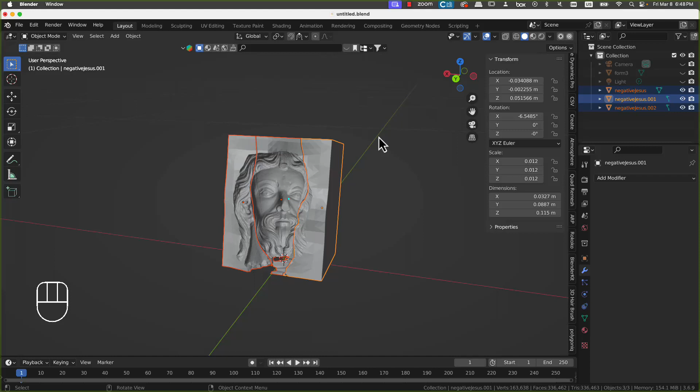Hi, I want to do a quick tour of some things for the midterm regarding 3D printing, specifically on using less material.

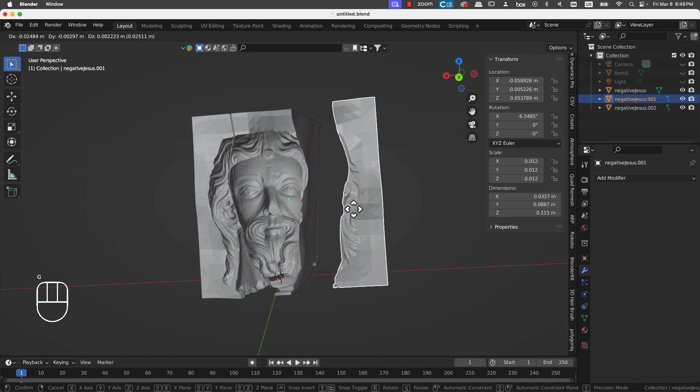Okay, so I have here the negative Jesus model that you've probably seen before, even as a ring with its parts. I'm going to work on one part, which we'll call part A.

I could do the cut now, but I'll do that later because what I want to go through is how to use less material. So I'll do File, Export.

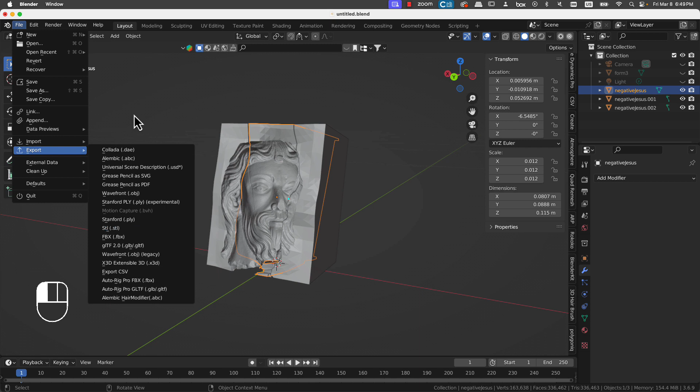Sorry, first I'll make sure that the size is correct. Each one of these squares is 1 meter, which is a bit more than 3 feet.

So that's quite big. If you want to check that the size is correct, you can append a file on the base folder called printing volumes. Click on append, choose the printing volumes.blend file, click on object, then click on form 3, and that will show you the printing volume size of the form 3 printer.

Naturally, you don't want the print to be larger than that, and we want some control on the size. So this size is sort of okay.

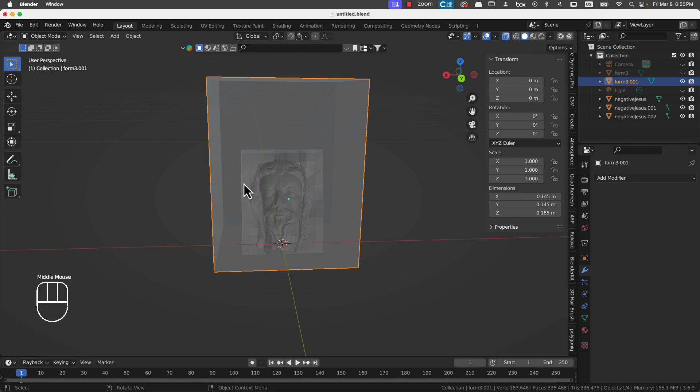If you need something more specific, I'll delete this volume now. Turn off the X-ray. Blender does have a measurement system you can use here.

You can also turn on this magnet here and click on face nearest, and that way I can move these measurements and measure things with a lot of precision.

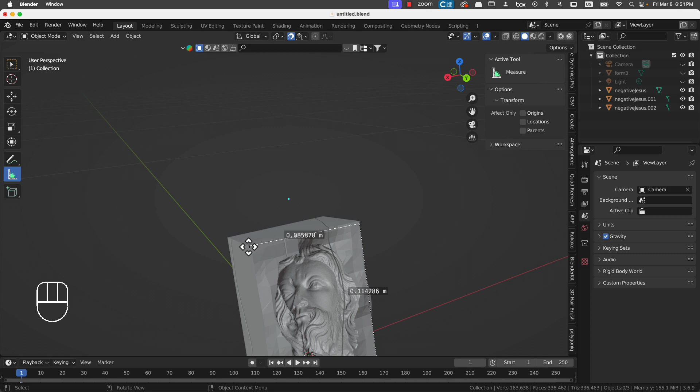This is good, for instance, if you need to do something, as we will do later, that is meant for a specific object, say a tripod, a PVC tube, or whatever. Okay, great, so we have this, and the size is sort of okay.

I check that with the cube. I'll make sure to turn off the magnet, and I'll start exporting. I'm exporting in order to make them a bit thinner.

When we're exporting, please, to keep things in order and not crash your desktop, use a name like sample negative Jesus export. Please put things in a folder.

When you are exporting, make sure that you have turned on selection only, that the scale is 1000, and that you're using scene units. This is so that it works as expected.

I know it's a bit weird that you have to scale it 1000, but that's how it works. We call it a good name, negative Jesus, and I know that this is the center, so I'll call it A in this case.

This is the first part that I export, and I press export STL. I'm going to do the same thing with the rest.

Export STL. All the things I checked before are checked now by default, so this will be B. And this third part will be C.

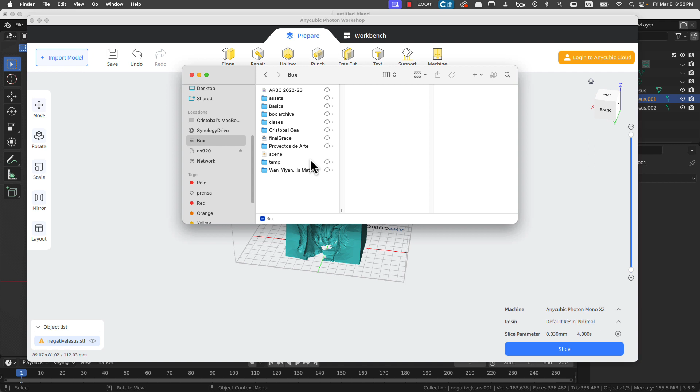So here under classes, 3D at the end of the world, you'll see a folder that says assets and apps. There you have the Anycubic folder and also the printing volumes. Those might be useful now.

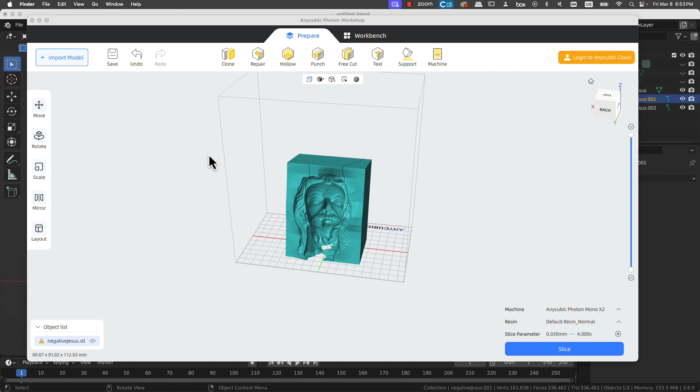Okay, so here's the Anycubic Workshop, Photon Workshop folder. It will ask you to use a printer for test. Just pick whatever printer; we're only using this software to hollow the object so that we're not spending too much resin.

Actually, this isn't the file that I had, so I will import a new model.

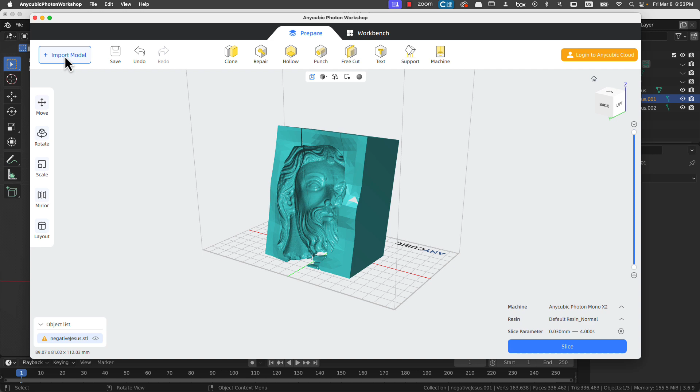Good, and as you see, the size is right. Whatever is red is out of the printing area, but in this case we don't really care. So we have this first size, and what we will do is use this menu here, the prepare menu.

Which is very simple, press hollow. It will ask for a wall thickness. If you're using the draft resin, I would go minimum 3 millimeters, and then you press apply update, and this will hollow out the print. So a lot less resin used, which makes everything a lot cheaper.

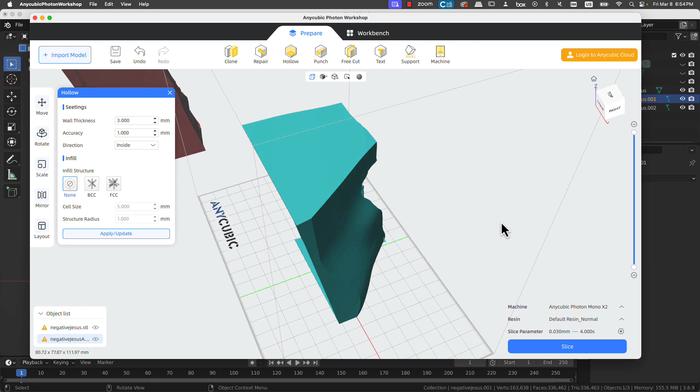The only problem is that if the resin has no way to go out, it will be just as expensive. So we'll press the punch button here. The punch button has an outer and inside diameter. I'll do both 8 millimeters since this is kind of a big thing.

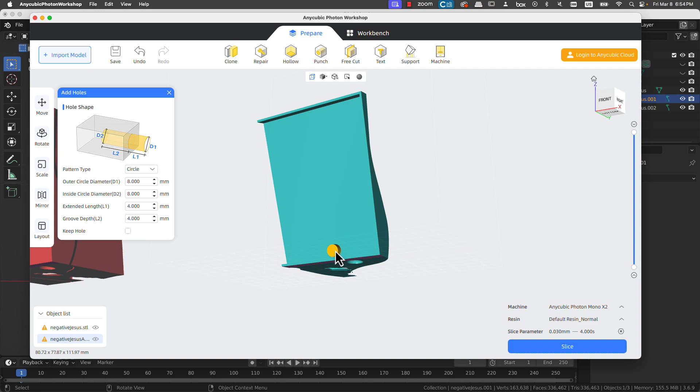And I will start punching holes. So you just punch holes, put some holes on the top and some on the bottom. And this should be enough. I want the resin to exit this very easily. So that should be enough.

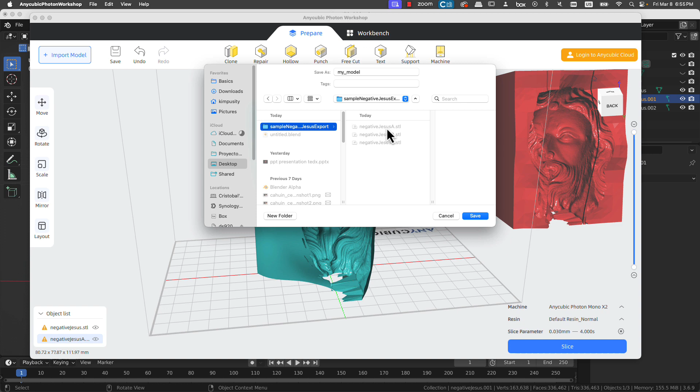Now you would only need to press File, Export Model, and put it here. This was a file, this was a negative Jesus A, right? So I press that too. I press Save, and I replace. I'll put it here, and again import.

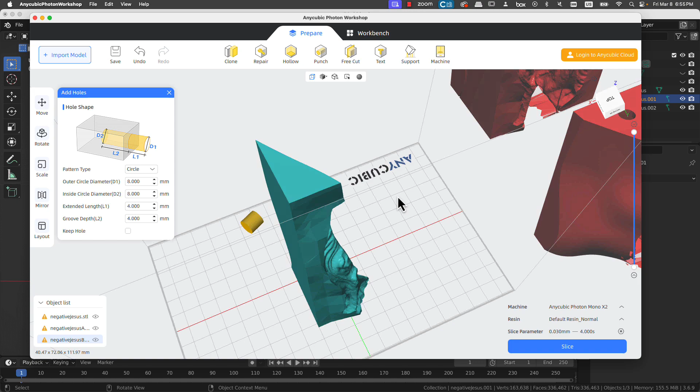I'll do the B version and repeat the same thing again, which is hollow, apply update, punch. I don't want the water to get stuck in there. And File, Export Model. This is the B version, replace.

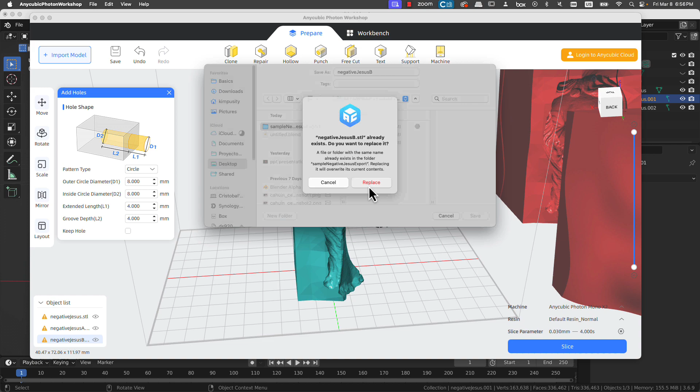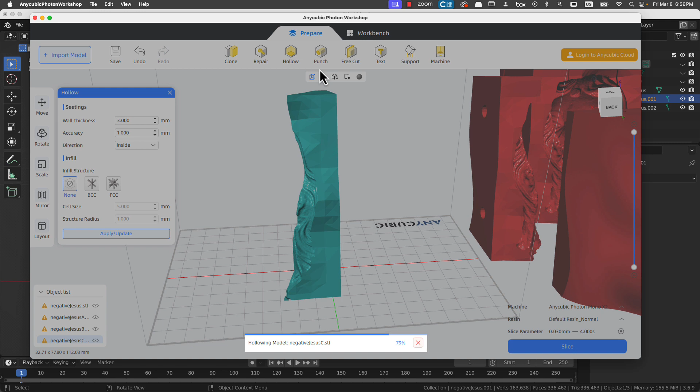And import model. Then we have the C, so you see it's good to know your ABCs here. I will move this one out of the way, so I only want to work with this one. Press hollow, apply update, punch. This is a little bit thinner, so perhaps I could use a 4 millimeter hole.

And beautifully, then I just press File, Export Model, and this is the C part.

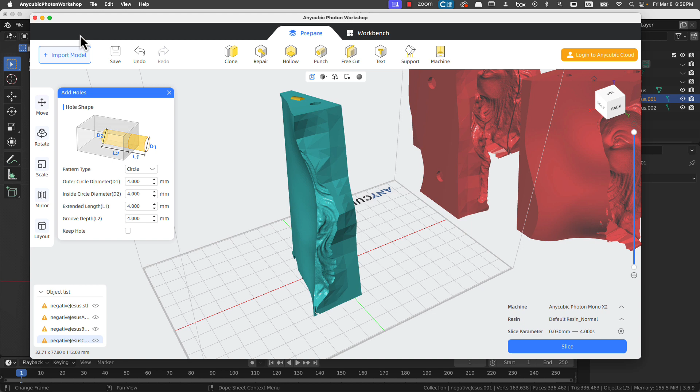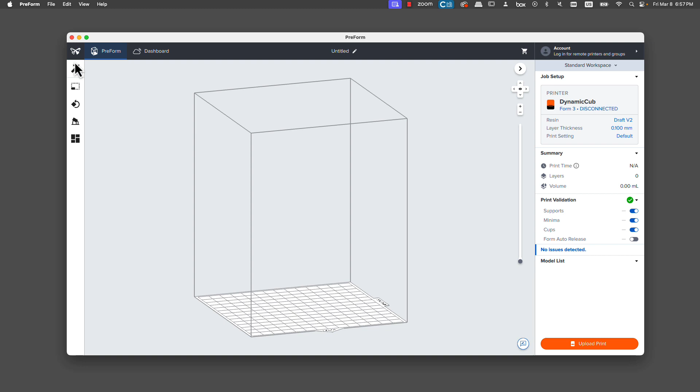And in Preform, we're going to check File, Open. And since we put everything in a tidy, nice folder, we can do negative Jesus A. Press Repair. It might be the case that it's importing everything.

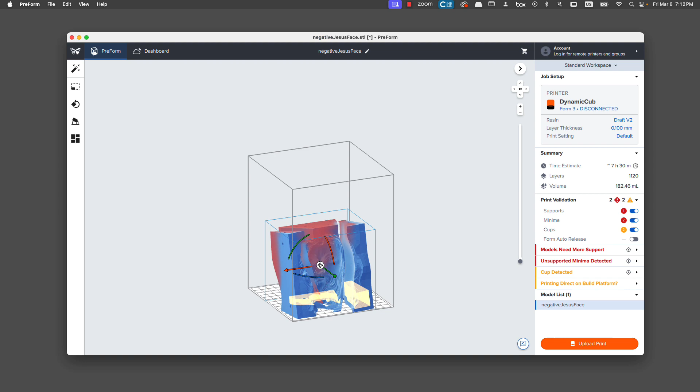Okay, and here I have the file, and as you can see, it imported the whole thing, so actually I had to do it again so that it fit on the thing. But you see the slider on the right? If I slide it up, you can see that...

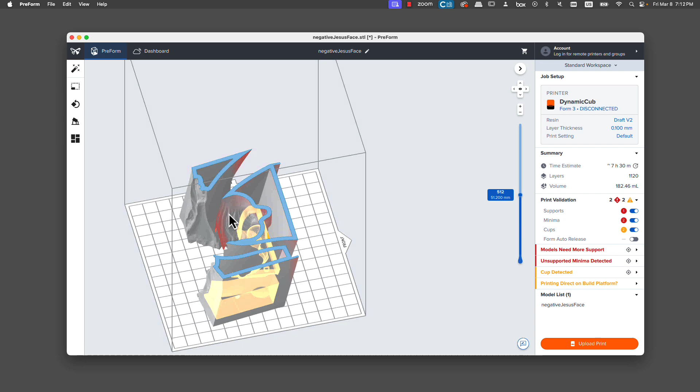It's hollow now, which is great because it's a lot less material. Let's see now the support things and all of that stuff. I'll just press auto generate. It might create some support for the other parts. I'll pause the recording again.

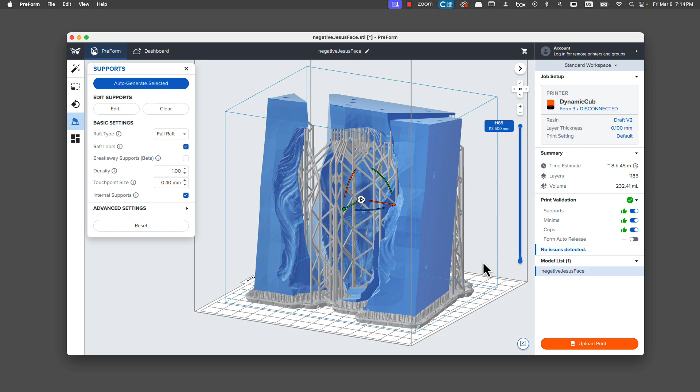Okay, and here we have the supports activated. Might be a bit over the top, but better safe than sorry. And it's still mostly hollow, right?

But the point is that it's only using, as you can see here, 230 milliliters, which is very important, and we ask you to take that number into account. It also provides a time estimate, which is great for you to know, whether you're doing a night shift or whatever.

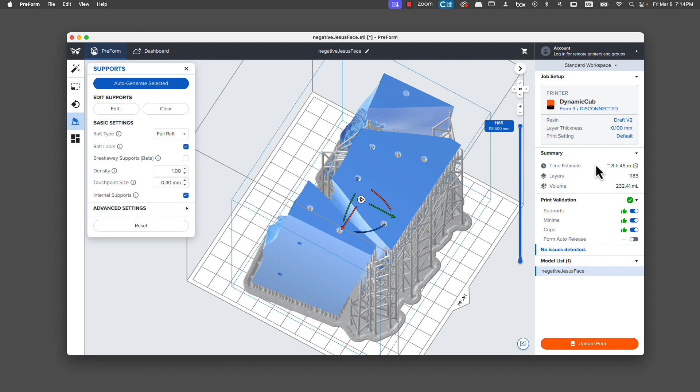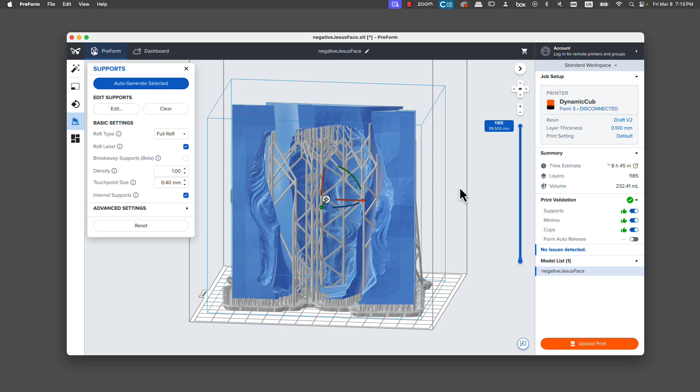We are 14 students, and we have 3 printers of the Formlabs kind, so we have to be very organized with that. Also, if you are willing, we're open for you to using the FDM printers, for which we'll do another tutorial.

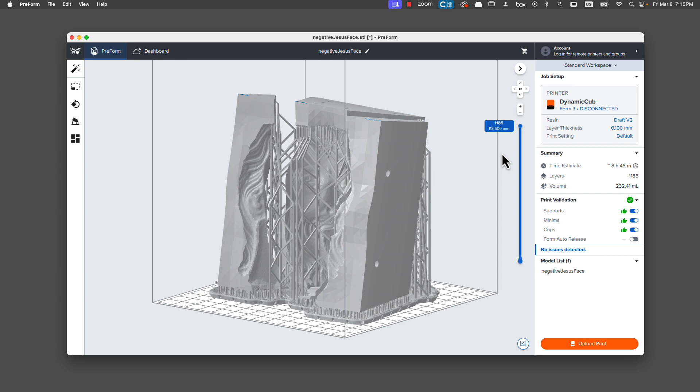But once you have this, and you think that everything is correct, you are supposed to then upload the print. And as always, save the file. But this is a way to have a print that uses substantially less material than the other prints, and therefore it's substantially cheaper.

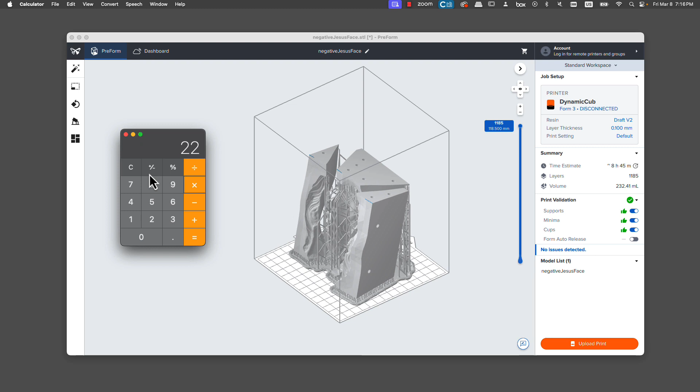Because actually, if I'm not wrong, it's 0.15 per milliliter, and this is 230, that's $30. It's not that horrible. I could do it all over again and make it thinner too, but for now I won't do it. And that's it. I hope it's helpful.